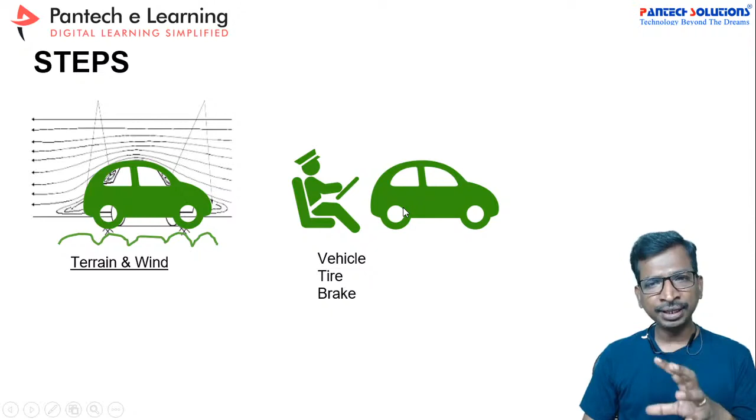So now let us take the same thing. First we should develop the vehicle, and after that we have to include the terrain and road surfaces. Similarly, additional points like aerodynamic drag issues and all, we have taken care of. Finally, if you apply a driver signal to the vehicle, then your vehicle will be completely ready. And after that, if you connect a motor with this system, then your vehicle is ready to kickstart.

So first you should develop a free body diagram, and after that you have to add the wind and terrain effects, and after that include the control signals like driver signals, and then include the sensors—what is the sensor value, how we can extract the parameter from the vehicle. Once you finish these three steps, your vehicle will be completely ready to kickstart and move on the road, right?

Yes, thank you. I could see a lot of yes answers. I hope you have practiced all the experiments.

So now let us take the same experiment, and we are going to take these basic parameters like vehicle type, half car model, weight of the vehicle, and dimensions of the vehicle.

Let us take the Simulink. Those who have not practiced, please at least practice from today onward, so that you could cover the entire EV system with MATLAB Simulink. Just to create a vehicle body, save the simulation.

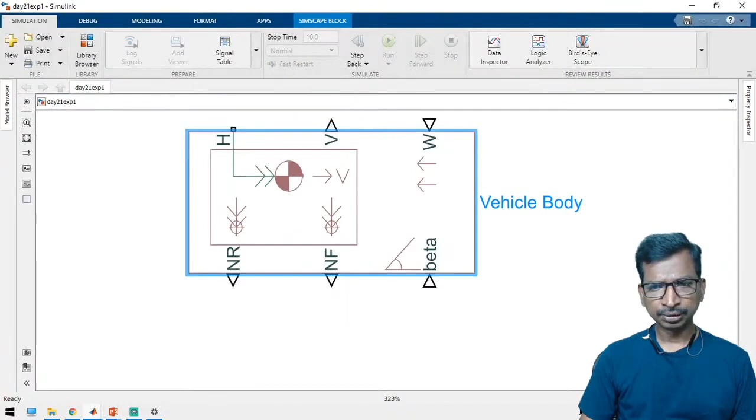Now just open the vehicle body parameter. We have to feed the exact data whatever we took as an example, right?

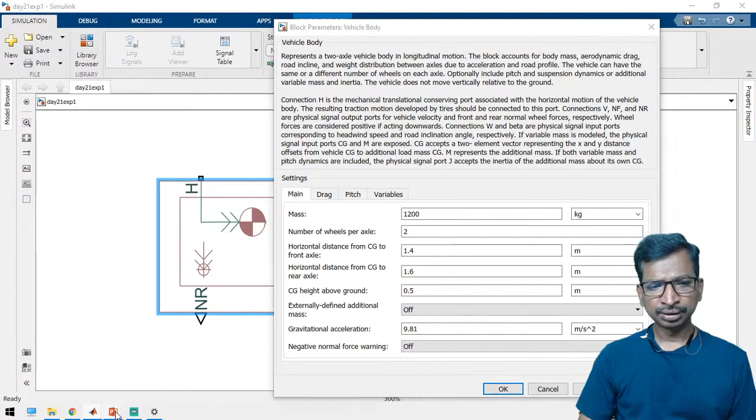See, the mass of the vehicle is 80 plus 237, and the number of wheels per axle is 1, since it's a half car model.

Horizontal distance from the front axle is 1520 mm, and similarly the rear axle is 1400 mm. The center of gravity height is 254 mm.

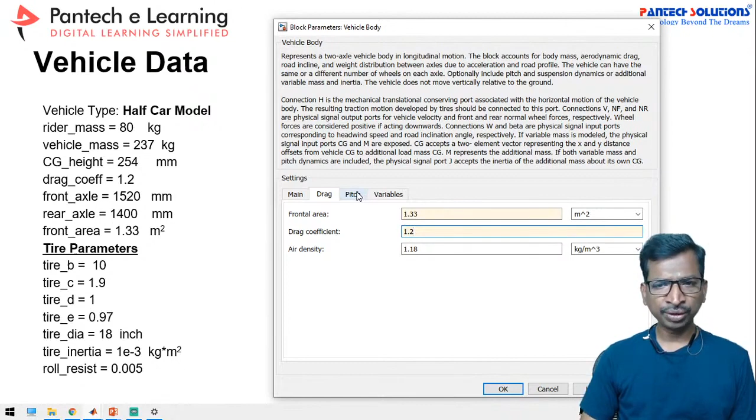Other things are not needed. Then drag coefficient—the frontal area is 1.33 meter square. Since it's a half car model, you can use drag coefficient 1.2, and air density generally 1.18, sometimes you may use that. So just apply this.

Now we have to take a tire model. Just take the tire magic formula, take this one and rotate it.

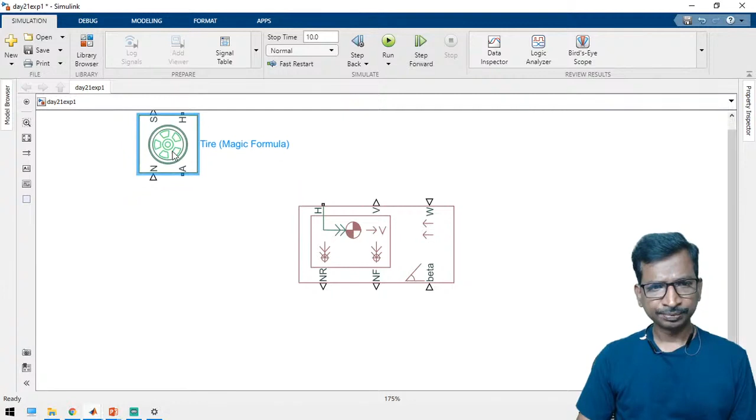So here I just open the tire model and use this one, load constant magic formula coefficients. By default the value will be applied, and for geometry you have to take care of the tire radius. The tire diameter is 18 inch, so the tire radius will be 9 inch.

And then for rolling resistance, you can just enable this rolling resistance and apply the value 0.005.

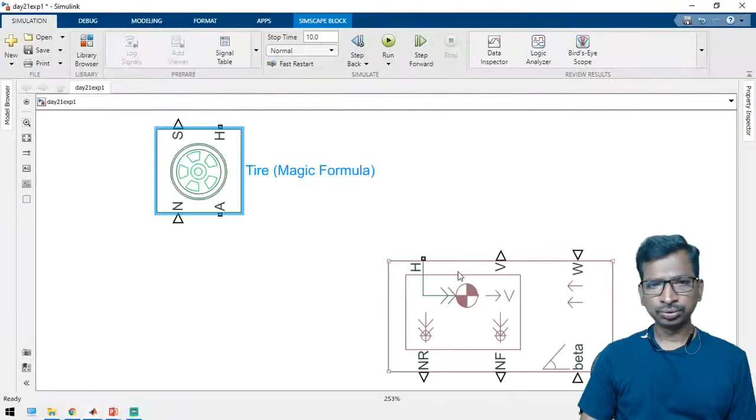So just connect this one, and this is the frontal, rear wheel, and then this is the front wheel. Just click.

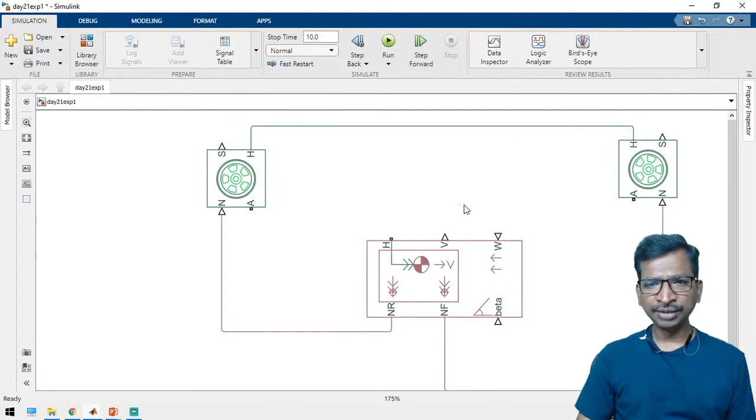Just connect the hub, because we already have seen this experiment, so no need to wait. And so the tire has been modeled, right?

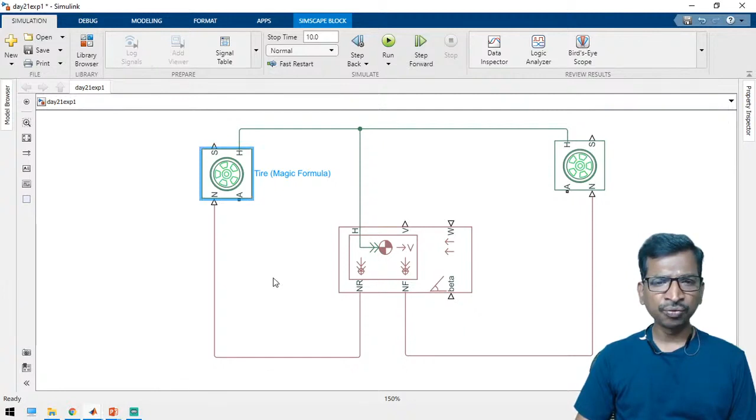Similarly, now we have to include the wind and terrain effects, right? And these are all the sensor data, so no need to discuss—I mean, no tire information is required right now. So in that case, just use a PS terminator.

Just use the PS terminator, and after that, this is the wind and terrain effects, right?

This block is used to sense your vehicle velocity, right? So the longitudinal velocity we can get. For that, you can use the sensor value called translational motion sensor. So just take the translational motion sensor.

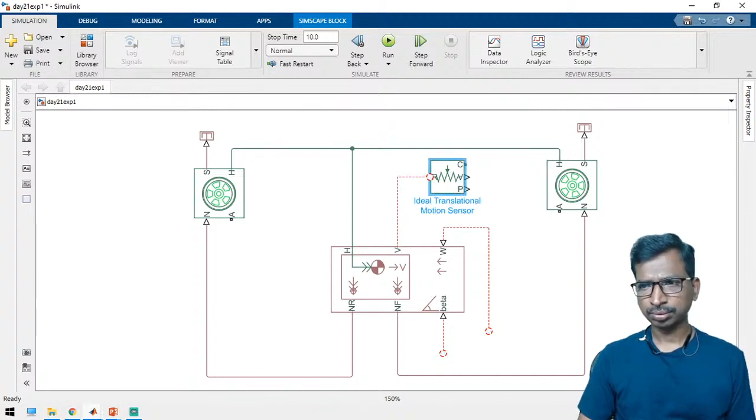Yes, so just connect as per this one. All right, okay, we have to connect at this point.

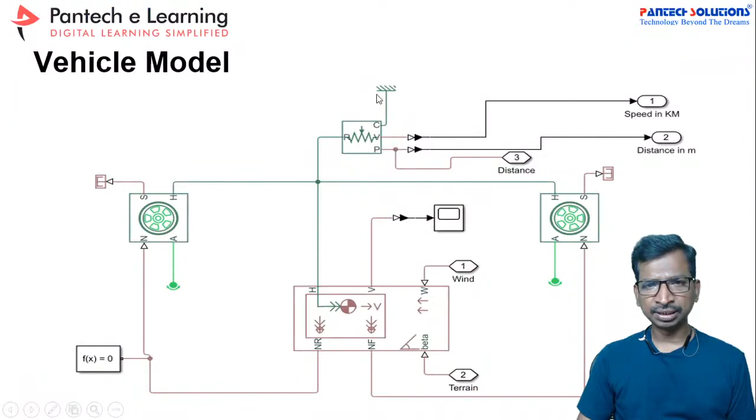So which means that we are going to measure the vehicle longitudinal speed, and similarly that C is the reference, mechanical reference one. So we have to take care, and similarly, take a PS constant.

Take a PS constant to feed the wind and then terrain effects, right? So this is the wind input, and this is the terrain input.

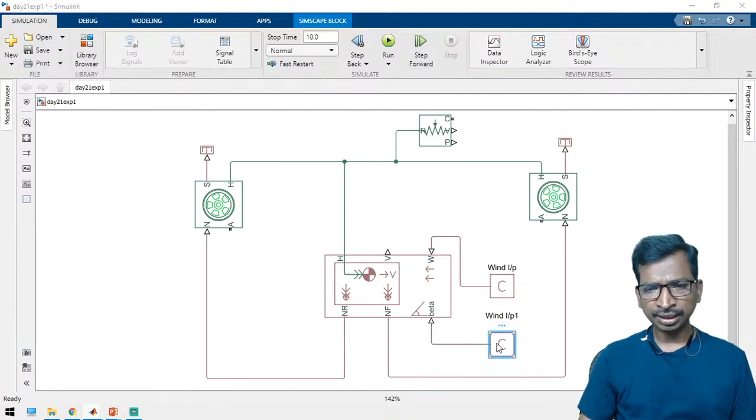As we know, the terrain input is generally the terrain, nothing but the road, whether it is an up gradient or down gradient. So we should feed the data via the degree, but MATLAB will receive only the radians.

See here, suppose if you are applying 5 degree either down slope, so for the down slope it is a minus, and the 5 degree is the 5, and we have to convert this 5 into radian. So in that case, you have to apply minus 5 into pi by 180.

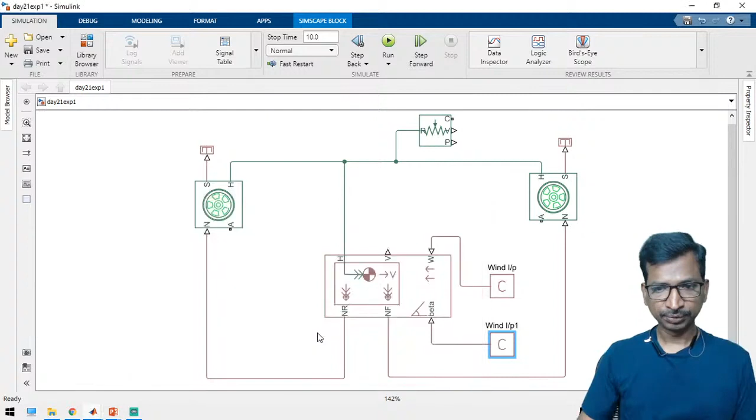So which means that minus denotes the down gradient, 5 denotes the degree, how much degree the value is going to be slope. Generally the maximum slope will be like 45 degree.

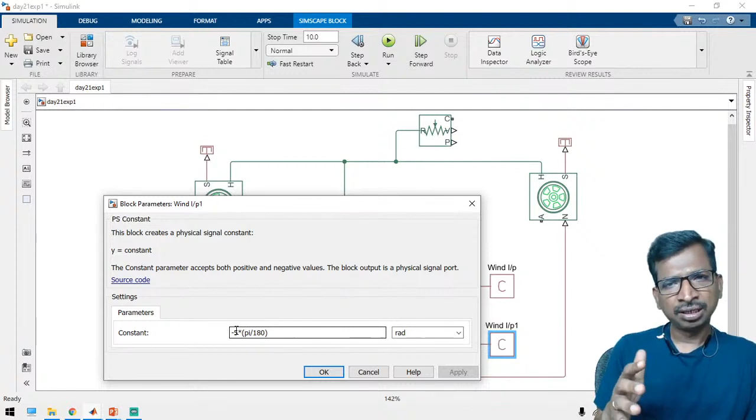For hill climbing, that is a dedicated hill area vehicle will be more than that gradient. But generally the 45 degree will be the minimum capacity of the vehicle, right?

And then pi by 180 denotes the degree to radian conversion, because MATLAB will receive a degree as a radian unit. So we have to add this one, pi by 180 degree.

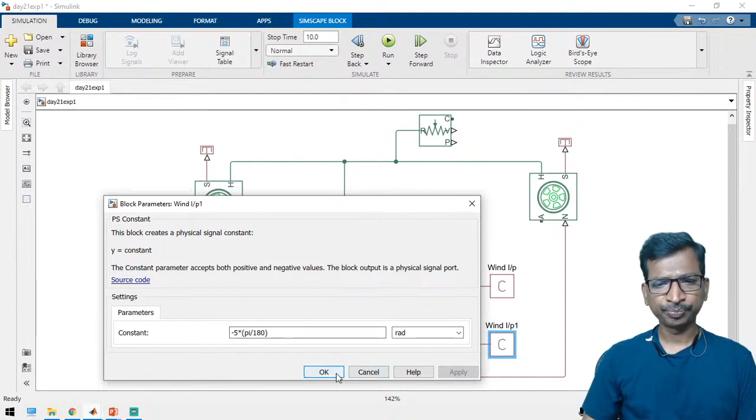Right, and now we can measure the speed of the vehicle. So just take a scope block.

And in between, you need a PS2 Simulink converter. So just take a PS2 Simulink converter, just take this one.

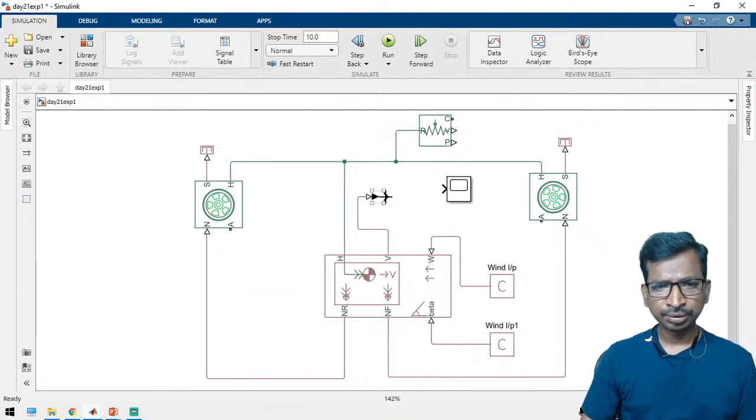Yes, so now we have connected all these things, and the header file we have to include. So take a solver configuration. Since it's a Simscape component, we have to assign this header file, the solver configuration. So do you have any questions?

Kameshwar, yeah, actually in the next experiment, instead of constant, we are going to use the lookup table to add the terrain effect. So please stay engaged with the class.

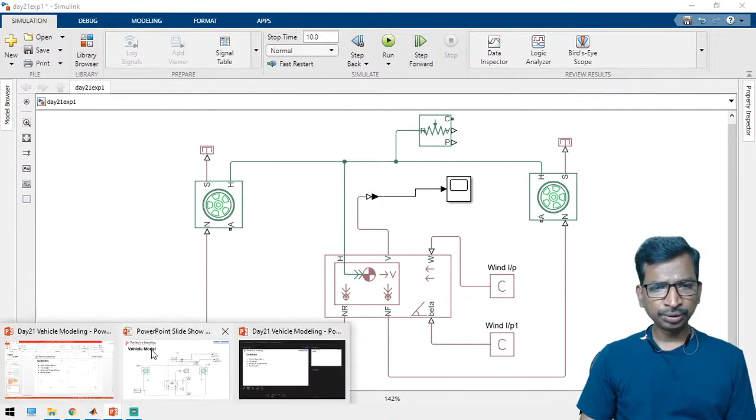Yes, so now do you have any questions? Thank you, participants. No sir, thank you. So now let us move to the next one, and yeah, so everything has been connected.

So here, this is the two output values. Here you can see the speed of the vehicle in kilometer, and then distance in meter, right? So from this one you have to take it.

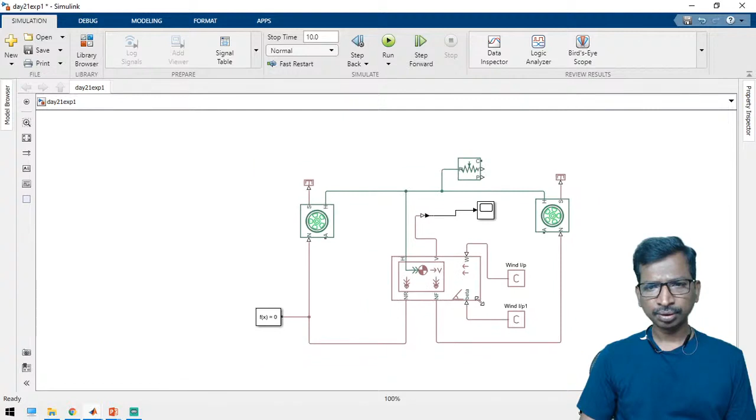So just take this block, and take a reference one, mechanical reference.

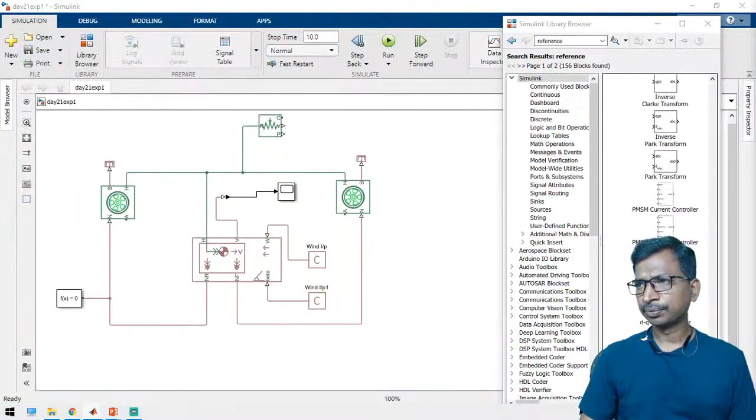So just use the mechanical reference. Forget it, just a second. Yeah, so just take mechanical, take this mechanical translational reference.

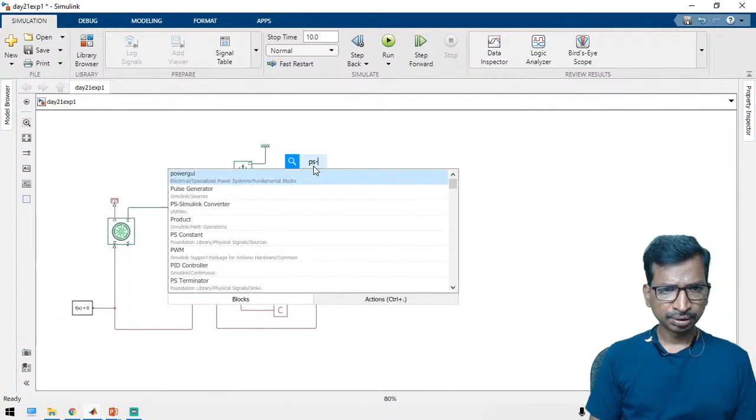Just connect it and take the same PS-Simulink converter. So this is the vehicle speed in kilometer and distance covered by the vehicle, and take these two values.

Yes, so now let us run this vehicle. Let us assume that wind is going to be constant, to 1. You can feed the wind using this lookup table also. I will share the lookup table information in the next experiment. So please keep engaged with the entire class.

So can you let us run the simulation for just a few seconds. So let us run this one.

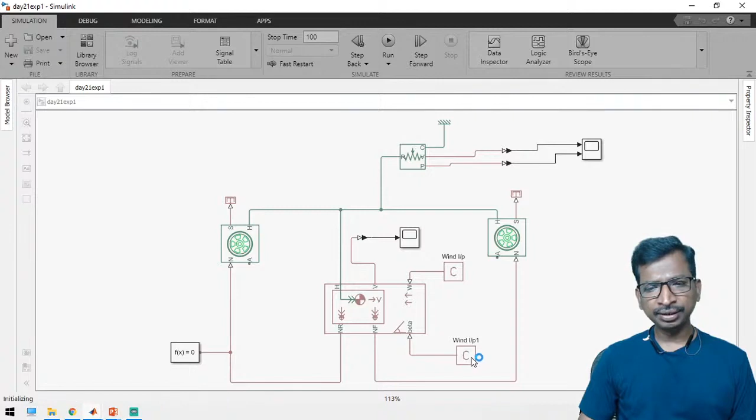So here the vehicle is in the negative slope. In that case, this vehicle will keep on in the positive speed, right? Because the terrain is not closed, which means that...

Yeah, see here, the vehicle is going to keep on running because the distance is continuously increasing.

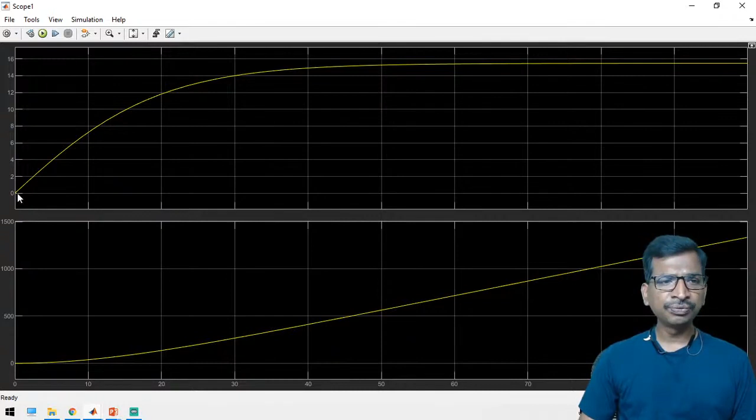Whereas once the terrain degree is saturated, the vehicle speed also will get saturated. So still the vehicle will be in running condition because the slope of the terrain is endless.

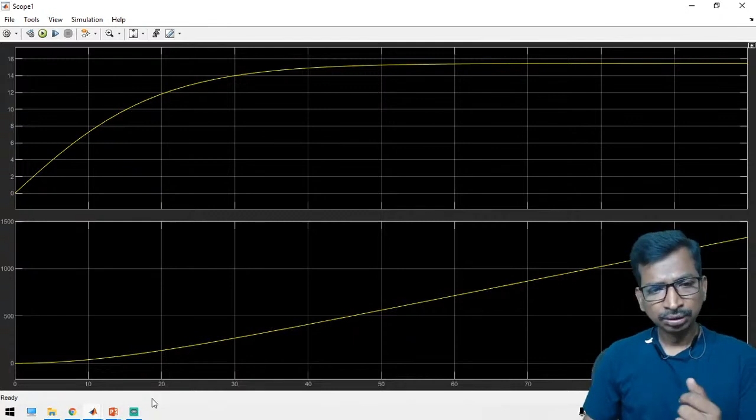So in this case, see here downslope, here we have used a 5-degree downslope. So we kept our vehicle at this point, right? So we kept this vehicle at this point.

So here the down gradient will be constant. In that case, the speed of the vehicle, once the slope is saturated, the vehicle will be in constant speed.

Suppose instead of this gradient, because the road will not always keep on negative or positive slope, sometimes it will be positive and sometimes negative. So in that case, let us assume that the road is going to be like this.

So the road is going to be like this. Now we have to feed these two values, so we have to form this gradient as a lookup table and then feed it to this terrain input.

So in that case, what will it be? Whenever the vehicle is in the downslope, after some time we have to check whether the vehicle reached zero speed or not. Whenever the slope is there, the vehicle will be in the respective polarity of speed.

Similarly, once the terrain is closed, nothing but the slope is closed, so the slope reaches 0 degree. Let us take this 5 degree. Once if it is here, then this degree will be 0 degree, right?

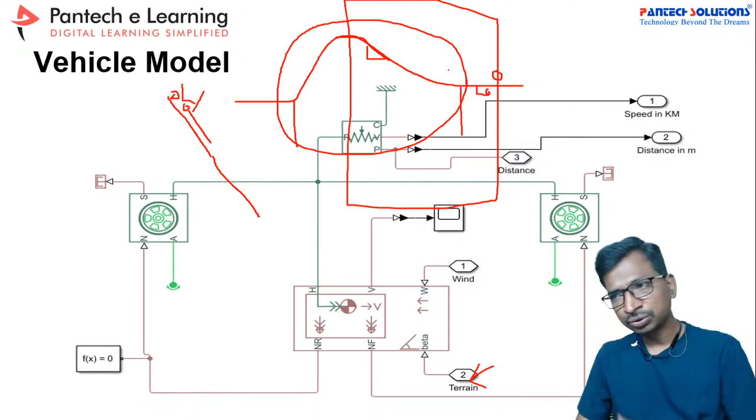So this is our vehicle body, the free body diagram. So this is our vehicle free body diagram. So here we are going to include this, include that one, right? So how can we include that one?

So here in MATLAB, I will share you the sample data. So this sample data I will share you, just take this one. Tomorrow in email, I will share you the sample data.

Yeah, terrain data. See, this terrain data denotes that... plot x position, comma, slope.

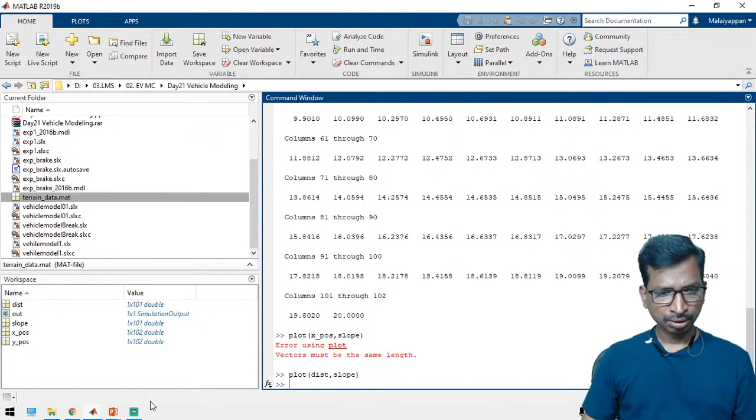Plot dist comma slope. And plot x position.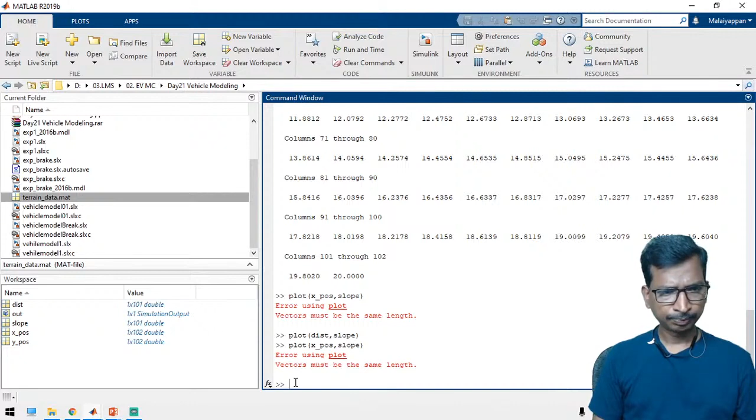Just a second, I forget the command.

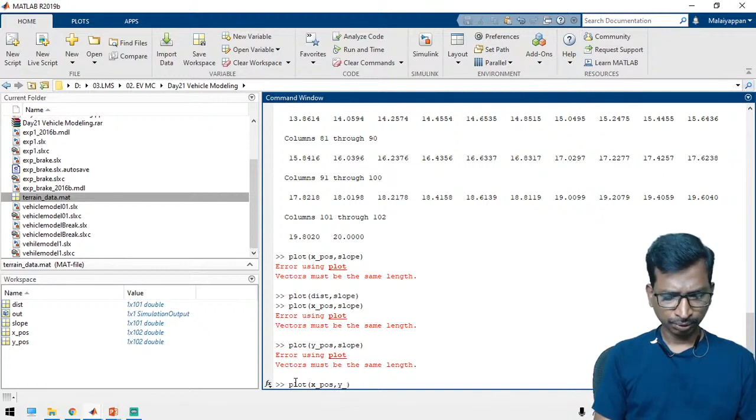Yeah, see here, this is our down gradient data sets, terrain data sets. At the zeroth instant, the slope has started. Once it reaches the ninth instant, then the slope is almost zero level, right?

So now we are going to keep our vehicle at this point, and we are going to test whether the speed of the vehicle reaches zero level at this point or not. So in between, we can apply a brake to control the vehicle, right? So we are going to apply a brake to control the vehicle.

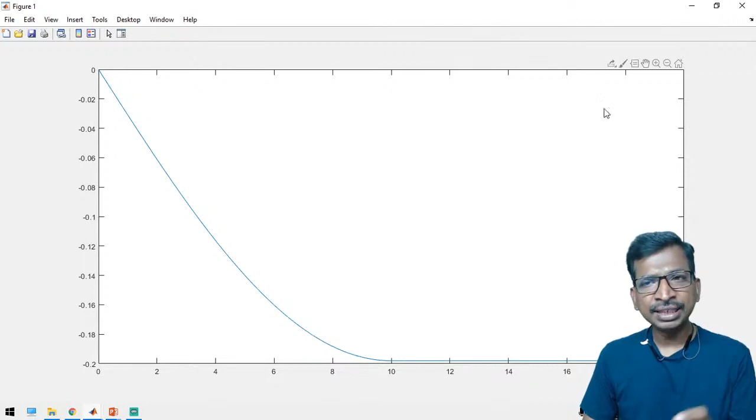So how can we feed this data? This is like a MATLAB data. See here, x position and then y position, and similarly the two variables, slope and distance.

So these four variables will be available in the terrain data sets. This is a mat file. Similarly, data sets like in machine learning or artificial intelligence, there will be some data sets used to train the system. So similarly, here we have used these data sets. This data set is available in the MATLAB default library file.

Still, if you want to load this data set, just check in YouTube. You can understand how to create a data set for this Simulink file. Like that, you can get a lot of stuff.

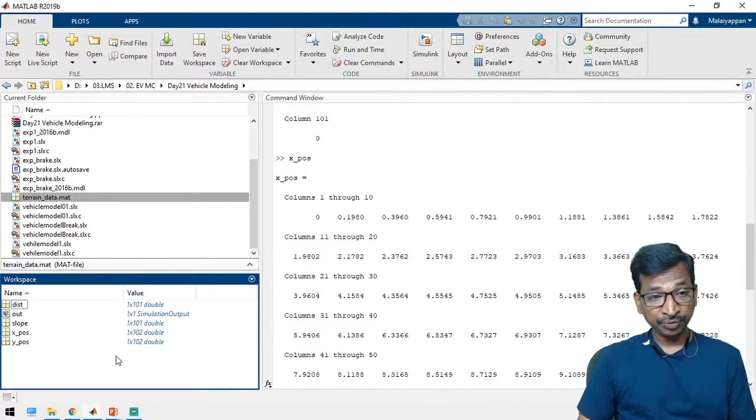So in that aspect, we are going to take this as a data set for our vehicle, and for this MATLAB program, we are going to use this one. So here for that, you have to take a lookup table. The lookup table is just to take this one,

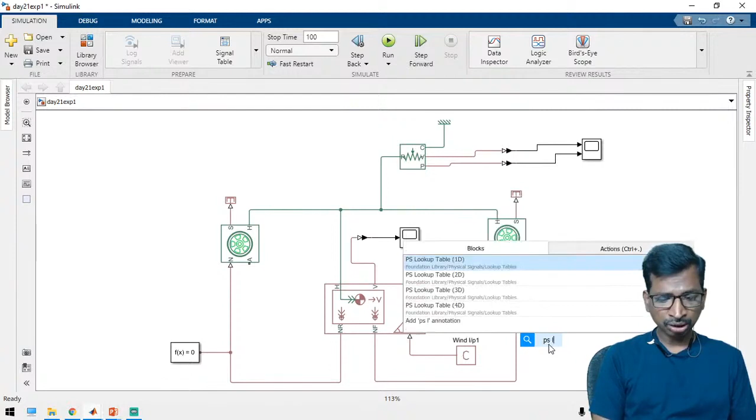PS search, PS lookup table. So just take a PS lookup table one dimension. Right, see here.

So we are going to take it, and this is the distance of the vehicle, right? So this distance can be directly connected to here, because the speed, previous speed must be connected to the current terrain. So in that case, just connect this value to this one, and finally you can feed this one.

Just remove this constant and connect it here. So now we have to feed the value, like see here, this is the table grid vector. So the table grid vector, now we are going to feed as a distance, right?

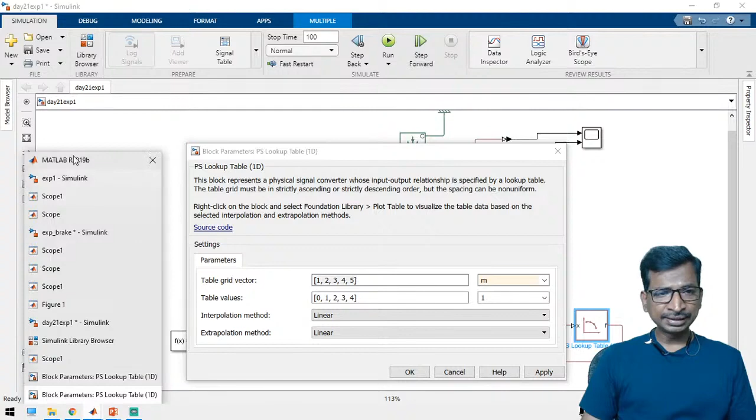So the distance generally will be in meters, right? So how much is the meter? As we know the terrain data set has 4 variables. So distance is one parameter, and slope is another parameter. Okay, so we are going to feed the value.

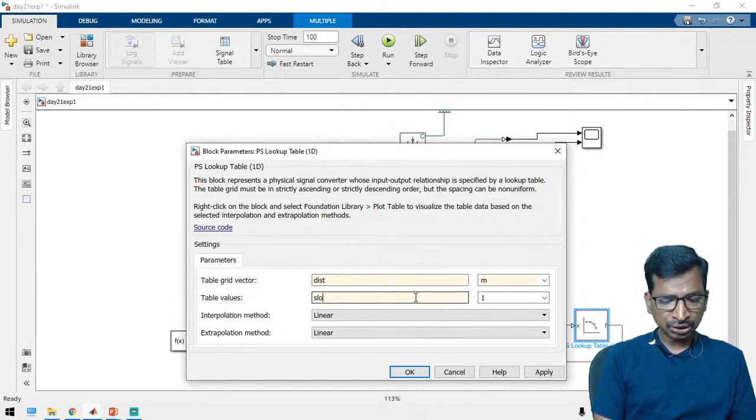So just open this dist, so distance and then slope. Here we are going to apply a slope, slope, and then degree will be the radians. So you have to use whatever parameter, whatever parameter data set you have used, the same parameter you have to use it. So dist and then slope.

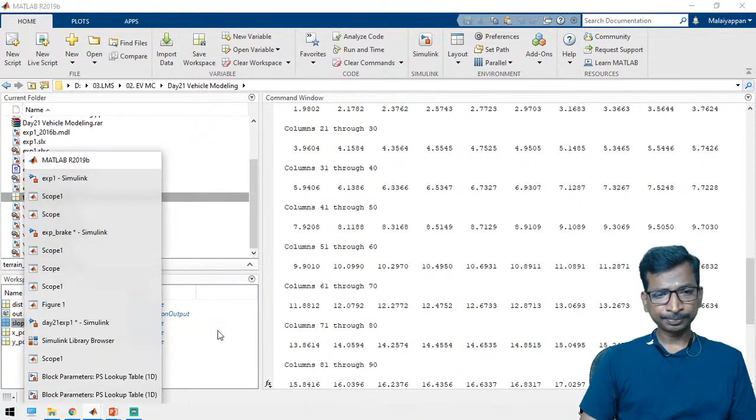Right, so we have applied this one. So now the same, see here, this formula has been applied. So this terrain we have applied to this vehicle, right? So now let us check how this vehicle can be responded.

So here we are going to measure the vehicle speed as well as the distance traveled, distance covered by the vehicle. Earlier we kept only the -5 degree, so the slope is endless, so keep on the vehicle will be in the running conditions. So now the slope is limited, right? After some time the slope is going to be 0 degree. So we are going to verify the vehicle speed response during the slope as well as after the slope. Right? Is it clear? So this is the initial conditions for this experiment.

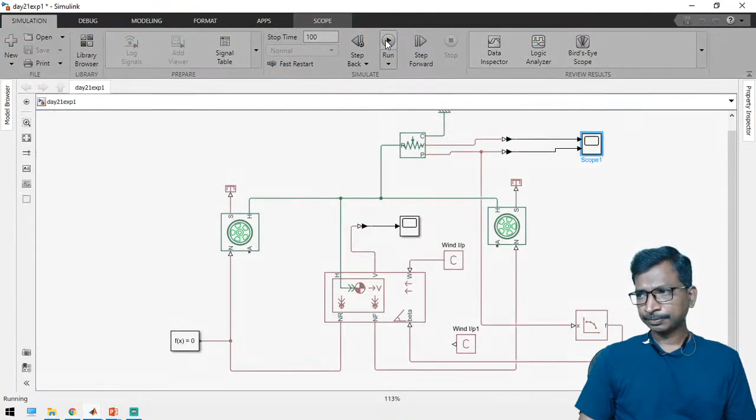Yeah, thank you participants. So now let us try to run this one. See here, earlier the vehicle speed was keep on increasing. See here, this experiment, this is the distance traveled by the vehicle. See, once if the slope is finished, after this the distance is limited, right? I mean, yeah, the vehicle distance is 0, I mean the change of distance is 0, right?

Yeah, we can use that rotational free end also. Ratnaraju, yeah, you have to use the rotational free end. So actually for simplicity purpose, I have used this one.

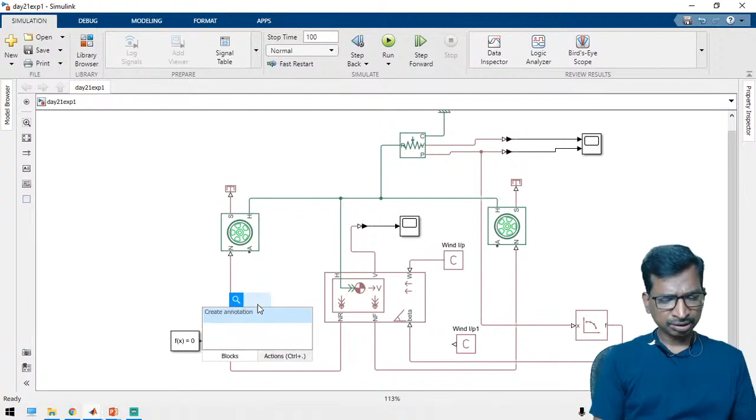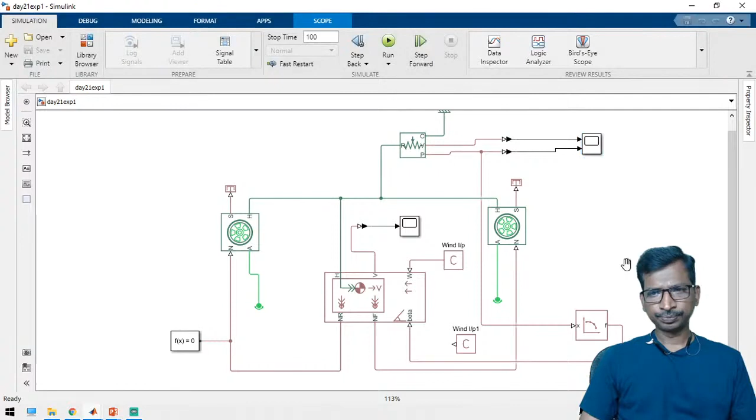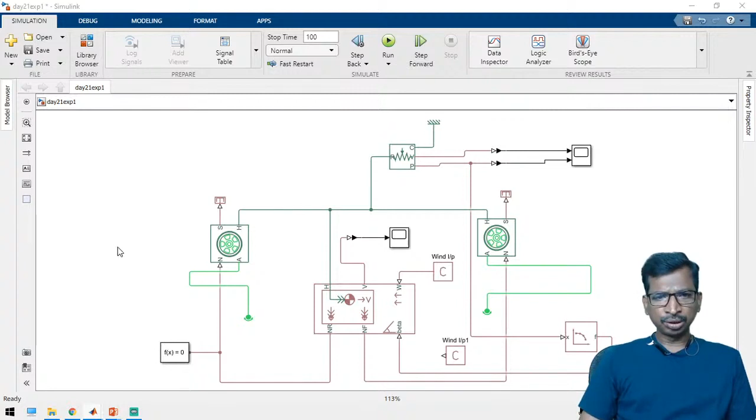So now we are going to add these braking mechanisms. So for that one, here we have to apply a rear brake, and then here we are to apply a front brake. See for that one, just to take this brake. So for getting the brake, see here, we are going to take one component called rotational friction.

Yes, here. See here the loaded contact rotational friction. And see here, generally this is like a disc brake. You can use the radius, how much radius if you want to apply. So generally you can keep it up to 300 mm, that is the maximum value. So I am going to use it like 280 mm.

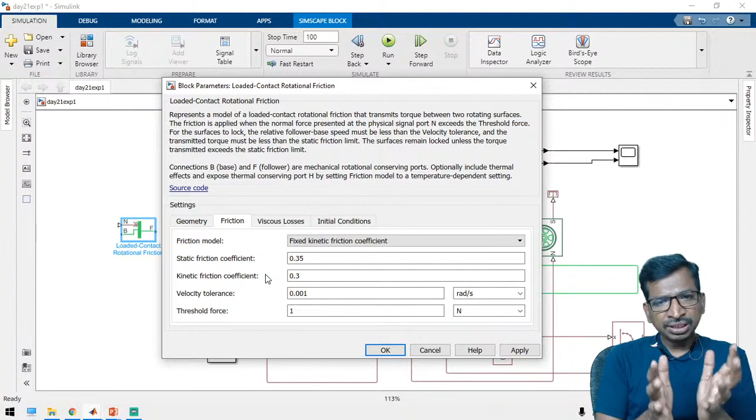And other than this, if you know these values, if you have perfectly calculated the mechanical parameters, all the parameters, you can feed it here. So here you have a complete facility to feed all the values, initial conditions and then viscous losses, how much losses is going to be there, and other things. So you can feed it, but generally we are going to take it only the torque radius. So if you reduce the radius, then the speed responses also will get changed.

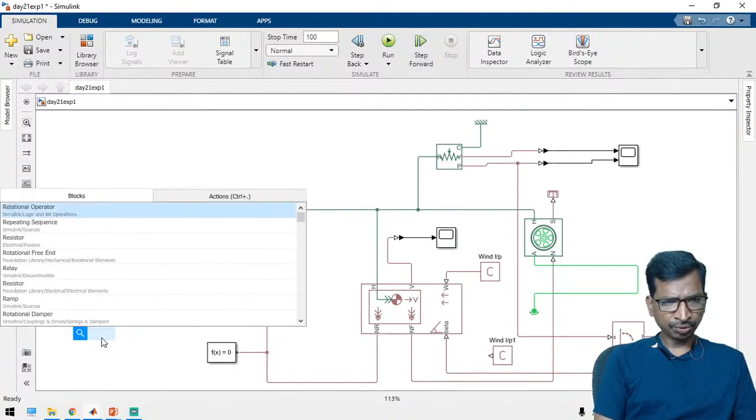Right? So now we are going to use at this point. Yeah, so this is the first one. Similarly, just to take a rotational free end, sorry, mechanical rotational reference frame. Yes, similarly take another brake. So here you have to apply.

Yes, again just to take the reference one. Since these are all moving parts, we have to use the mechanical rotational reference. Now we are going to apply a value at this one, so for that, just take a Simulink to PS converter.

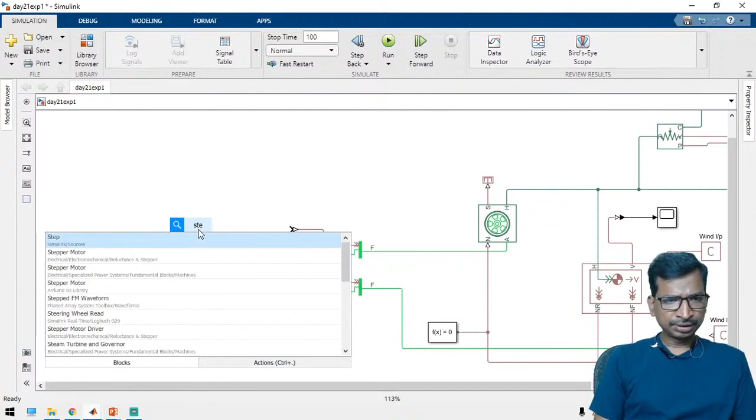Here we are going to apply a brake signal. So take a step input, just to take a step, as per our diagram.

At the 20th, this is the x-axis value. At the 10th instant only the slope is going to start. So in that case we can apply a brake in between here, anywhere. This is one brake, and we can apply a second brake here. Let us check one by one.

Just connect, and the brake value you have to take it, front and then brake. So just apply the Newton meter, this is the value, brake value will be the Newton meter. Let us first take a front brake and then rear brake.

So front brake we can apply at the 20th second. Initially it will be 0 and then final value will be like 100 Newton, and the step time is 20th seconds. We are going to apply 100 Newton meter torque to the brake.

Similarly, at the 25th second, we can apply a bit more torque. Earlier we applied 100 Newton meter, now let us apply 200 Newton meter. Let's check how the vehicle is going to respond.

Earlier, whatever the slope, the vehicle has responded to that slope. Now here, at the 20th instant, we applied 100 Newton meter for the front wheel. At the 25th instant, we applied more torque than the previous. In that case, the vehicle speed approached 0 - so the vehicle has been controlled.

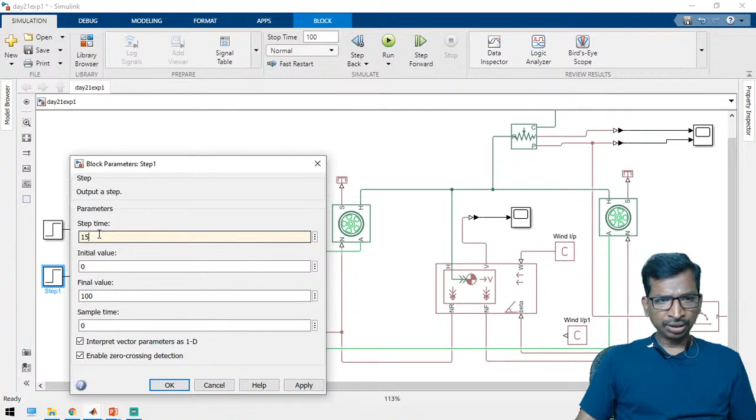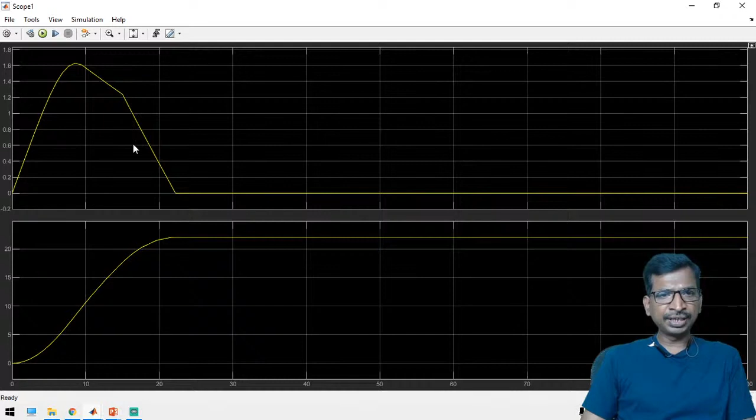Now you can apply this at any instant between these things. Instead of the 20th second you can apply it at the 15th second. Let's try running this. See here, at the 15th instant the vehicle speed has been reached.

So like that, you can practice on your own and then share the output in the video comment box. Is it clear?

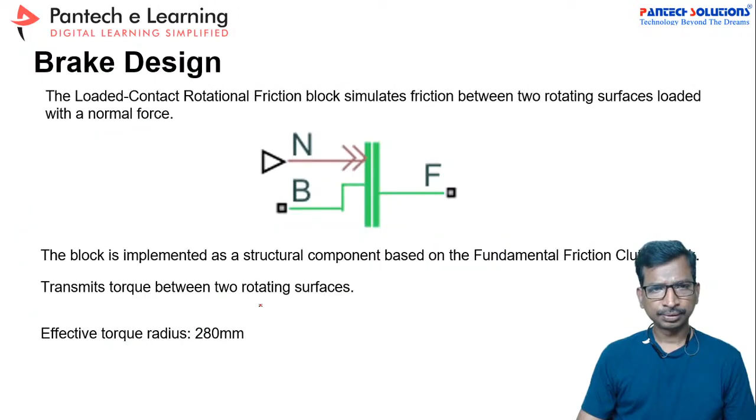Can we import a CAD model? Yeah, you can use that one.